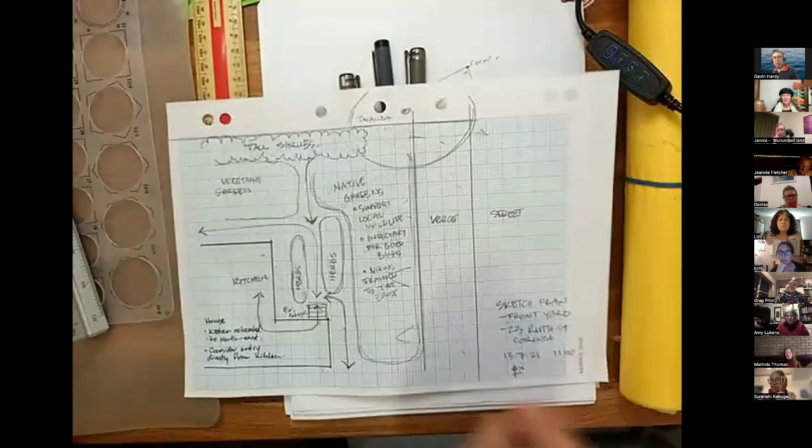And I put on my second camera. Okay, so, you know, I might go to a client's place, and the only graphic thing that I'll do for them is draw up a little mud map.

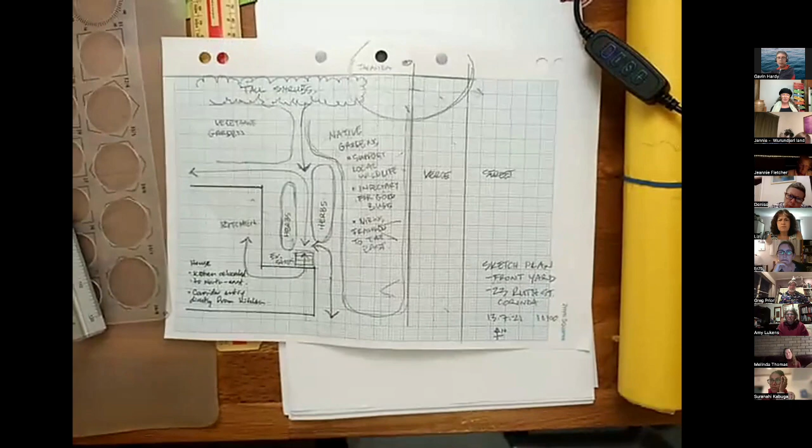Can you guys see that? It seems a little bit blurred in my view, but is that coming out okay, Morag? It does look a bit blurred. Can you focus? Yeah, not sure if I can. I'm using a smartphone as my overhead camera, so it should, but I think you can get the gist there.

Like, you can just see they're basic bubble diagrams. It's a very simple sort of thing. It's got a little title in the corner there with a funny little north point in there. And I've actually drawn it up to a little bit of scale, but a mud map doesn't necessarily need to be to scale. We've drawn this up over the kitchen table at the client's place.

Okay, it's a very simple graphic. This is the same client, and we're just nominating different spaces for different activities, different uses and functions, and how you might move through the site. So you know those arrows, sort of showing access. And if you've done my previous landscape graphics workshop, we got into the sort of bubble diagrams and using arrows and those sorts of graphics to indicate access.

That might be all that's required just to get the message across to your client, just to help them start to think about how to organise their space.

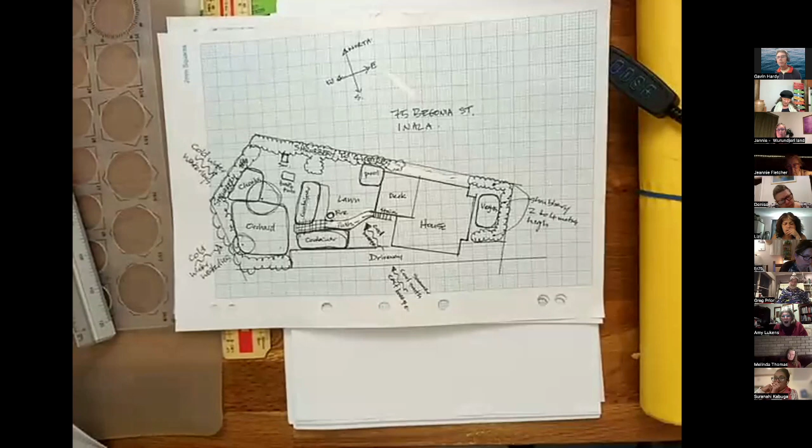What else have we got here? So that's the mud map. The mud map is sort of the first piece of graphic design that you might do, and probably the easiest in terms of drafting something up for a client to use. You take a photograph of it, send it to them, take a scan of it, take the whole thing home with you, then scan it and send it to them. That might be all that's required, and that gives them a start.

That's the mud map. I'm going to talk a little bit about the content of this amazing book. Not sure if there's any landscape architects in the room. Probably not from what you answered in the straw poll, but this is sort of one of the landscape architects' Bibles, this book. First year landscape architects - not sure if they still do it these days, but when I went through landscape architecture 25 years ago, this was the book for learning how to do landscape graphics. And it's still in print. I really recommend, if you're going to get into this stuff, to have a look at Grant Reid's book. So I'm just going to flick through this a little bit.

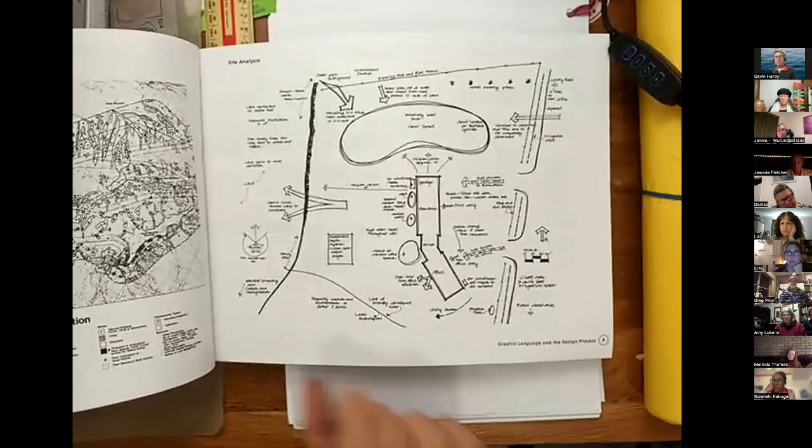Let's talk about the different types of plans drafting that you might get into. Now this is for landscape architects, but it equally applies to permaculturalists who are doing work. So this is a site analysis plan, using the bubble diagram. I'm sorry you can't probably read the text, but again, it's very loose drawing - it's just a site analysis.

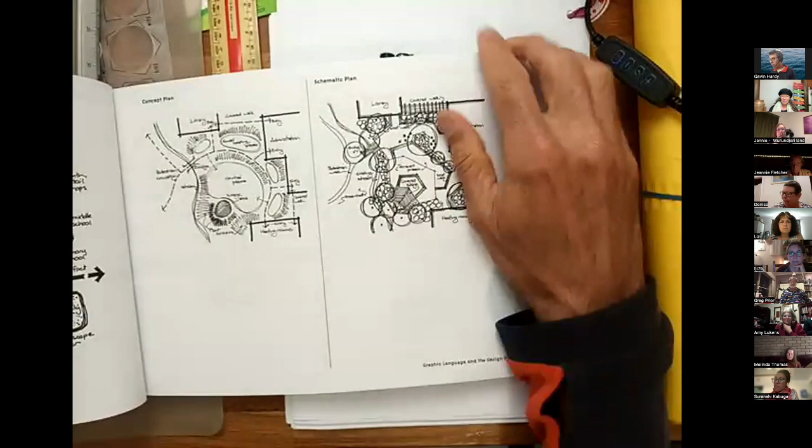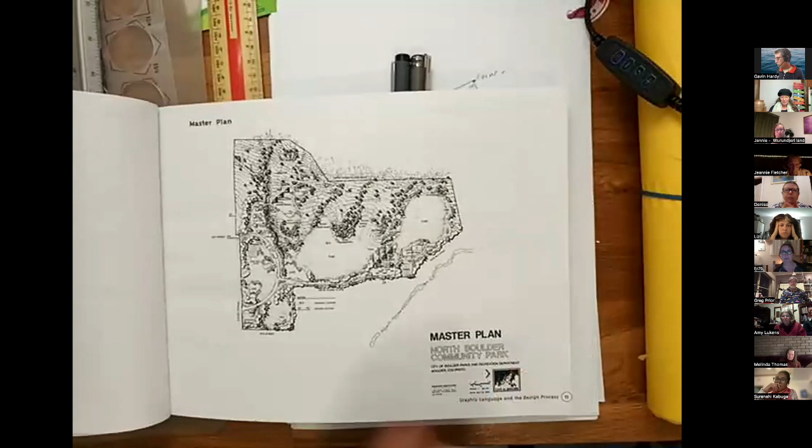So like a master plan, very, very detailed work. You guys probably won't get into master planning so much unless you start working on very big sort of eco village projects and that sort of thing. These days, if you're working at that scale, you'll probably be working with a graphic designer or something like that. You probably won't need to get into that sort of stuff.

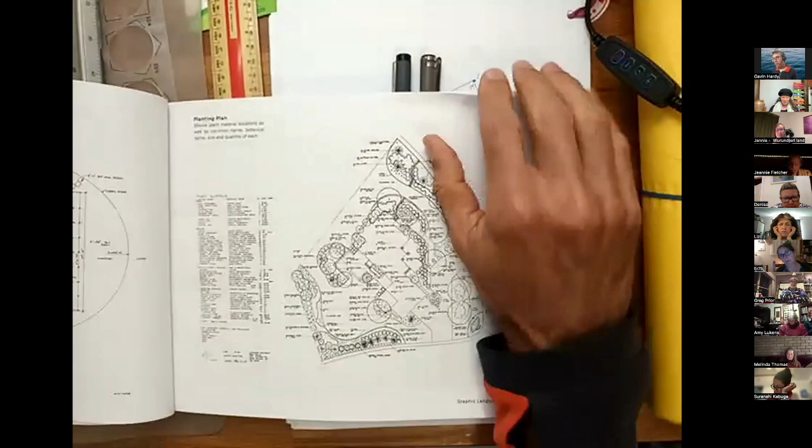Well, you might get into construction plans as well. So these are like grading plans, this one here, or a planting plan. That's the sort of thing you might have to get into. So the different types of graphics, very detailed construction drawings, that sort of thing.

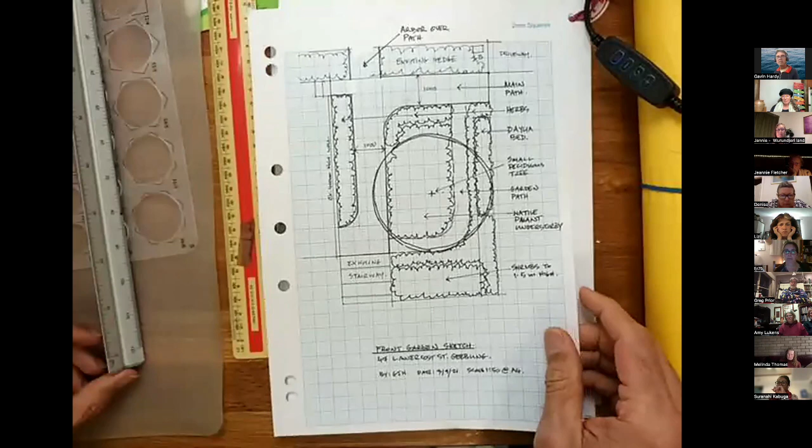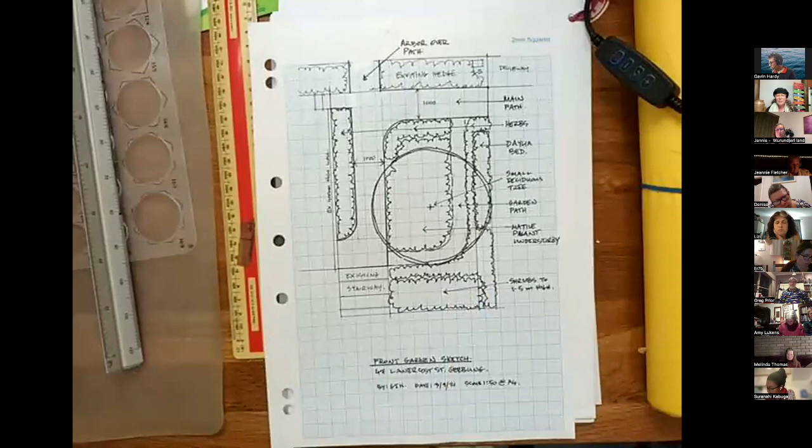Perhaps the next level up from a mud map I was showing before is just a bit more of resolved plans. So again, this is a fairly quick little plan I've done for a client, but it's not as loose. I've used a ruler in this example here to draw up paths and that sort of thing, and it's drawn to scale - the scale is 1:50 in this case. And I've used annotations, these arrows to indicate, and with text to indicate different functions and different things going on in that little garden in there. So that's sort of next level of drafting.

If I share my screen - yes, thank you. See some thumbs up there. So this is sort of perhaps the next level of drafting.

So don't get too - it looks okay, but it wouldn't be accepted in a professional sort of office, architects, big consultancies, that sort of stuff. But for the work we do, if we're just trying to convey an idea, and your client might want to take that information and share it amongst their group and share it around, that style of graphic is probably okay, and it's cost effective too. I mean, you're not going to muck around for too long putting that together.

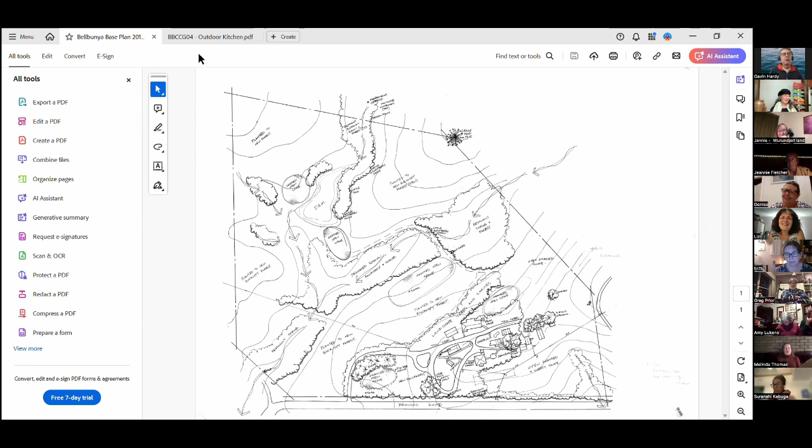So that's actually - I think I can move that image. Maybe it's locked. Yeah, so I've scanned an image, I've inserted it into Microsoft Word, going up into insert pictures, brought it into Microsoft Word. I've set up my page as an A3 size page.

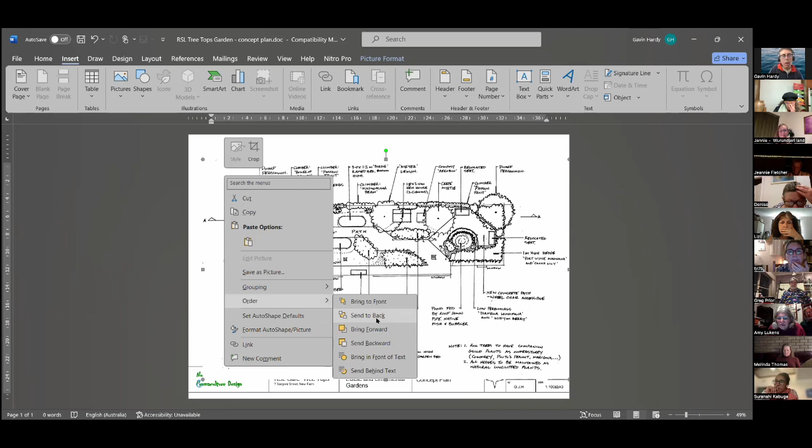And I've got - look at that, it's actually masking over the top of the title block. So I just need to set that back if I can. Oh, and now I've lost it all. So there you go, it's playing around with me a little bit there.

Yeah, but then the title block itself is just created through Microsoft Word, so very easy, I can actually edit all that. They're in text boxes and that sort of thing. So if you can learn that sort of stuff with Word, then you can actually create a drawing quite simply.

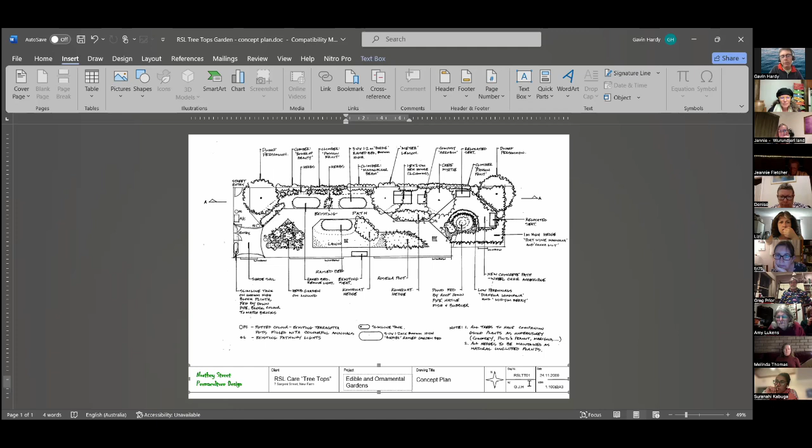Okay, so is there any questions so far around what I've just been showing you? Do you reckon you could pull something off like that? Tracing paper, create a little title block in Microsoft Word, pretty easy, that sort of thing. Later tonight we'll get into creating a title block, all right?

So there's a question there, Gav, around - so Lavina and Chloe asked earlier too about, do we get faster with practice? It takes us ages to draw by hand, was their first question way up. And just then they were saying, what about editing drawings if you want to edit your hand drawings?

Yeah, I just do iterations. I just go over it again with another piece of tracing paper and keep the bits that I want and change the bits that I don't. It all depends on whether you're getting so fancy and colourful with them or not. So Lavina and Chloe and everyone else, you do get faster, but you've got to keep on with it. And you know, I really encourage people just to keep a journal and do some drawings and doodling and that sort of stuff, and just get really confident with using pens and pencils and paper and all that sort of thing.

And then, editing - so the drawings I showed you were the final thing for the client, okay. I'm going to show you just how you work up a design using simple butter paper, okay, so just keep on playing with designs and that sort of thing. One of the drawbacks of hand drawings, and even the final design, is the client might come back and want to make a whole lot of changes. So what do you do? I've only got this hand drawn thing, what am I going to do about it? So you have a master copy basically that you can continue to change.

Yes, there's a whole lot of scales and scale bars in here. Very rarely will you be drawing anything at 1:25, like an architect drawing a room. But you might get to 1:50, like a small garden - that's probably the smallest scale you'll draw. Typically you'll be drawing an A3 plan for a backyard at 1:100, or if it's a big backyard, 1:200. If you're on a rural property, you start getting into 1:500, 1:1,000, maybe even a really big property at 1:2,000.

Do people need a bit of an explanation about what scale is? Is that something people get? I think a lot of people get stuck on that. There's also a question in the chat saying, I've got a scale rule, but notice there's more than one to choose from - do I need all versions? That's different sorts of rulers, but also just scale 101. Maybe just put your hand up - oh hang on, we can't see everyone, drop in the chat if that's a yes, if you just need a bit of scale 101. Yes, yes, yes, yes please. Okay, let's do that.

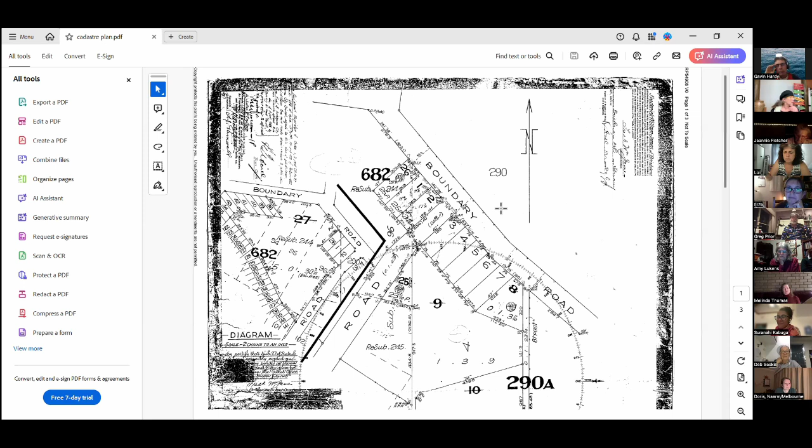So here's an example here, guys, of a cadastre plan. This is a really old plan for a property that I worked on. Let's see if I can pull that across. I can't. If I try and zoom in.

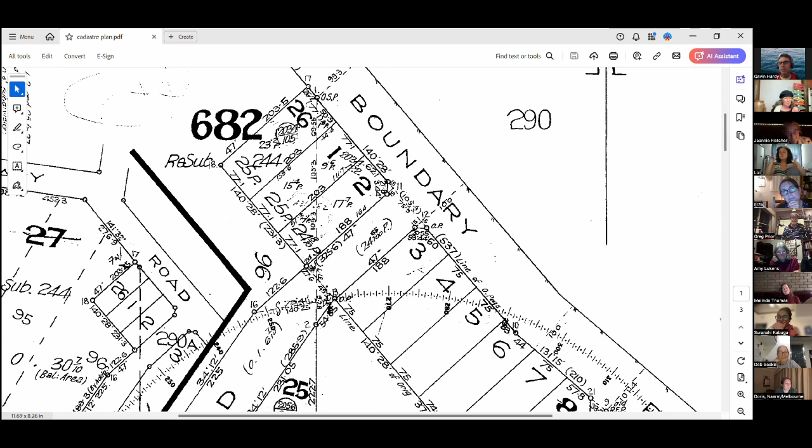So these are different properties on a certain street, Boundary Street, as you can see, and all of the dimensions here are in feet. If you're an American, you'll be familiar with this. If you live in the archaic world of the United States and you haven't got up to speed with metric yet, you'll be familiar with this. Bit of a joke there.

But you'll see there's some dimensions. For example, there's 75 at the bottom of the screen, 75 feet. You'll see 188 feet, that's the size of that property. Back in the 1880s when this part of Brisbane was developed, the surveyors created cadastre plans, or property boundary plans, so that people actually knew exactly what they owned.

And so we can use that information to form the basis of our base plan. You need to make the conversion, converting feet to meters, if you live in the metric world. You can also see some other numbers here, there's 47, that number keeps repeating through there. That's the angle, the bearing of that line, that property line through there. It's an angle of 47 degrees.

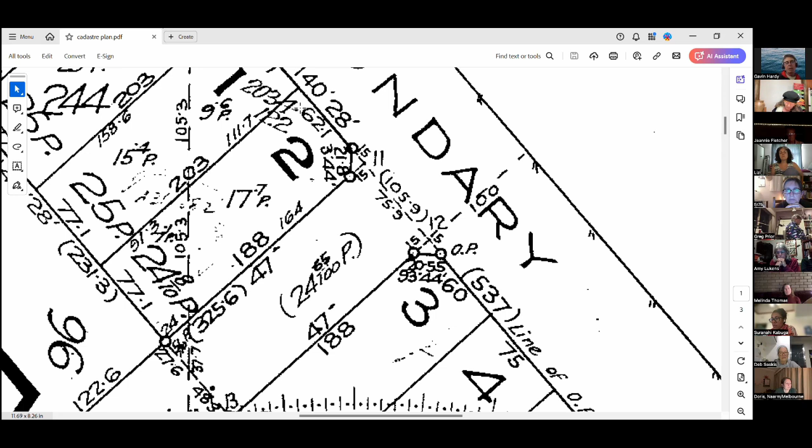You'll see up the top of the screen here, 140 degrees and 28 minutes. It's another bearing of that line running through there. So you can actually use this information to start plotting it on your plan. It's really, really important information to get.

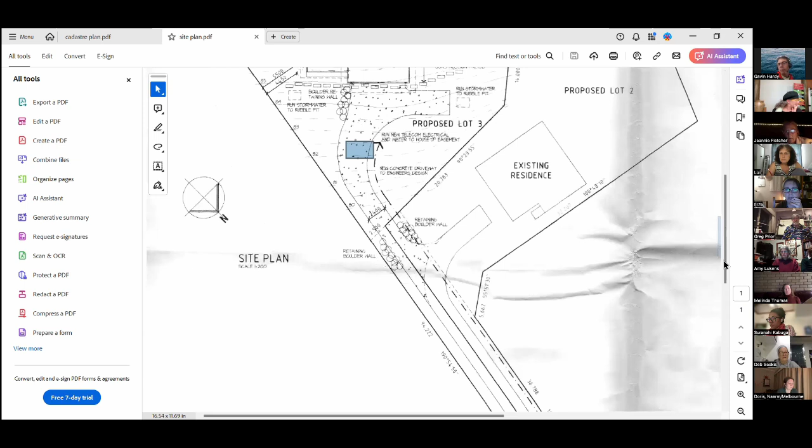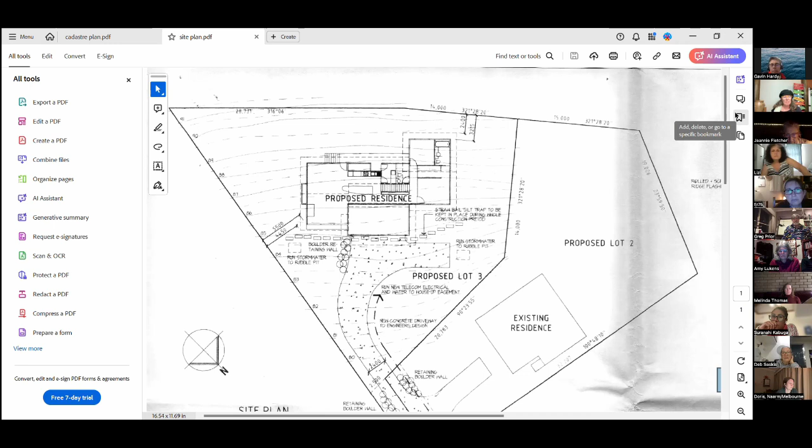Here's a plan that a client actually gave me of their residence. That sort of property information is really handy. It means I don't have to go and measure up the whole site, including the whole property and where it is in relation to the boundary. You can actually use that as your base plan, all you need to do is trace it. If you can get that sort of information, it'll save you a lot of work.

I'll keep going in that direction. You'll see there's the architect who drew it up back in the day, and the drawing has a scale, at the bottom of the screen there, in the title block. So if you can get the original drawing, then you're home and hosed. You've got a scale you can work with, and you can start transferring that information onto your plan.

Any questions as we're going through here? Just looking at the chat now. Yeah, okay, great.

So next thing is how you actually measure up your site. I'm going to share my camera again.

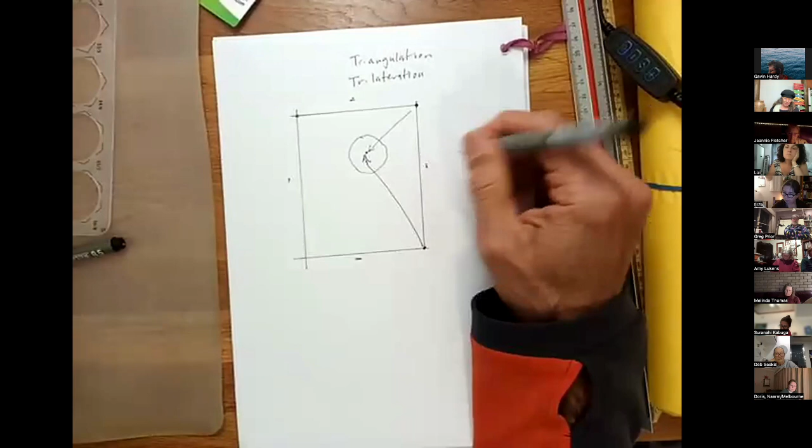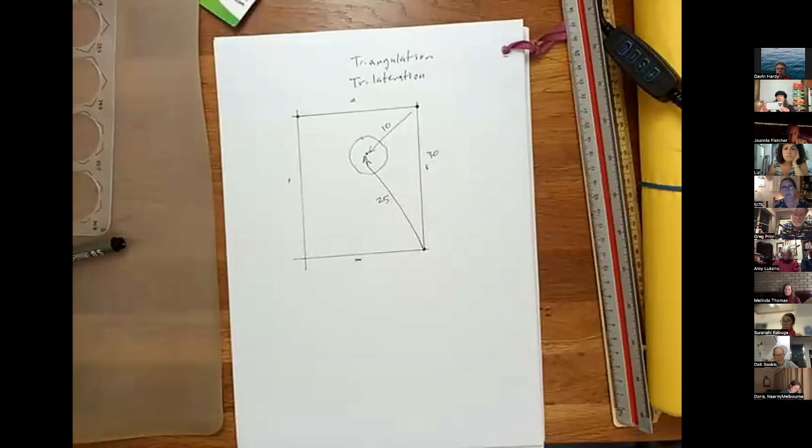Well, if these are known points, and if these are known lengths, then we can use a method called trilateration. You might have heard of a technique called triangulation, where you use angles to work out where things are. But this technique is called trilateration, and it's a far easier technique for most people to use. If you get a tape measure out on site and measure from that known point, the corner of the property, to the tree trunk, and from the other known point at that corner of the property to the tree trunk, then we have 3 known lengths: the length of the property boundary, and two others. Not going to get into algebra, I'll give it some real numbers. Say that's 30 meters, and then we might have this length here, say that's 10 meters, and that's 25 meters. We can take that information and plot it on a plan. That's a very simple example, and we can do that for all the trees and all the features all over our property if we need to. We can trilaterate every feature on our property.

Surveyors will use triangulation if they've got an instrument that will help them do it. The way GPS works, fun fact, is through trilateration - the global positioning system. When you're driving your car, where are you in the world? The satellites are up there trilaterating where you are. Does that make sense to people?

Let me just stop sharing. Yeah, that's right, triangulation is using angles. That's right, Morag. You can set up 2 datums as well, yeah, that's not a bad way to do it either, but the way I teach it is just trilateration.

That's sort of the technique. So have a go at that at home.

Very soon, just something that you know, either the property boundary or your corner of your house or something like that to a tree. Just measure it up and see if you can plot it on a plan. That's trilateration.

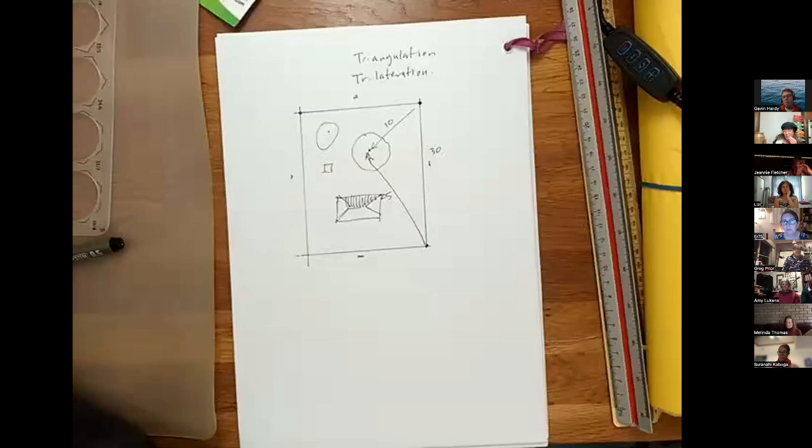All right, so we understood we've got known lines. They're called property boundaries. There they are there. And I've got features within my site that I want to measure, and I want to know fairly accurately where they're located. And I've got known points on the property boundaries.

So from those known points, I can take measurements. That's really what we're doing here, from known points to unknown points. Okay, so that's my property boundary. And that's my property boundary.

Okay, and I just get my tape measure out. Really helps if you've got 2 people to do this. It's very hard to do this by yourself. I'm just taking a measurement from there to there, and for argument's sake, it's 10 meters.

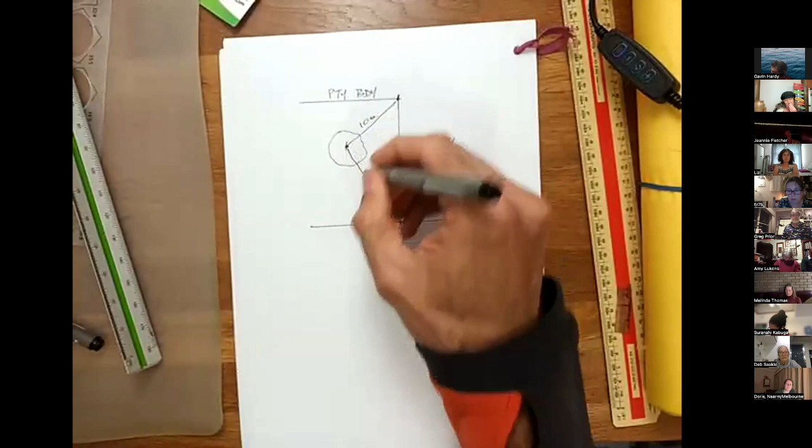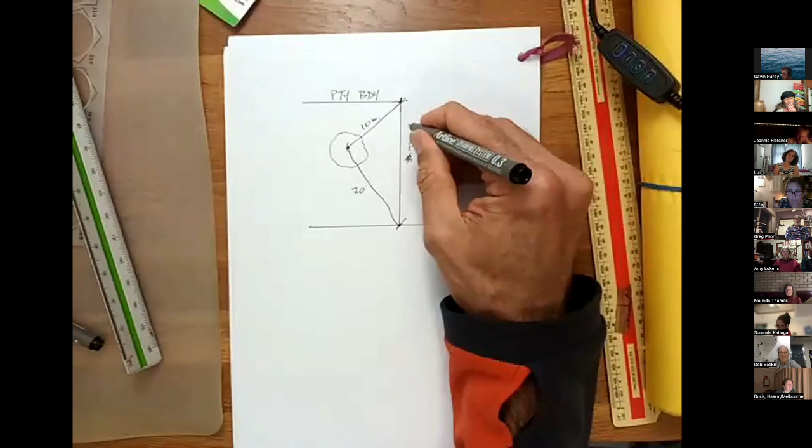And then I'm taking another measurement from there to there, and for argument's sake, that's 20 meters. And if I already know what that measurement is, because it's a known line, it's property boundary, I might have got it from a cadastre plan, might have even measured up along a fence line. Fence lines don't always correspond exactly with property boundaries, but they're a fairly good indication, say that was 30 meters. So I could take that information and then plot that on a plan. And I'll show you how to plot that on a plan to scale in a minute.

Okay, thanks Gav. Does that make sense for folks? Yep, and I think the plotting on the plan is the next important part of the puzzle, isn't it - understanding how that gets from your notebook onto your plan. Yes, exactly. All right, so let's go into a little bit of that.

Okay, I'll come back to aerial plans in a bit. I think you're probably champing at the bit to understand how the heck do I draw things to scale, so I'm just going to get into that work now.

All right, here we go. Bit of an exercise I'm going to get you to do, but first of all, okay, have a read of this. Okay, so working out the appropriate scale.

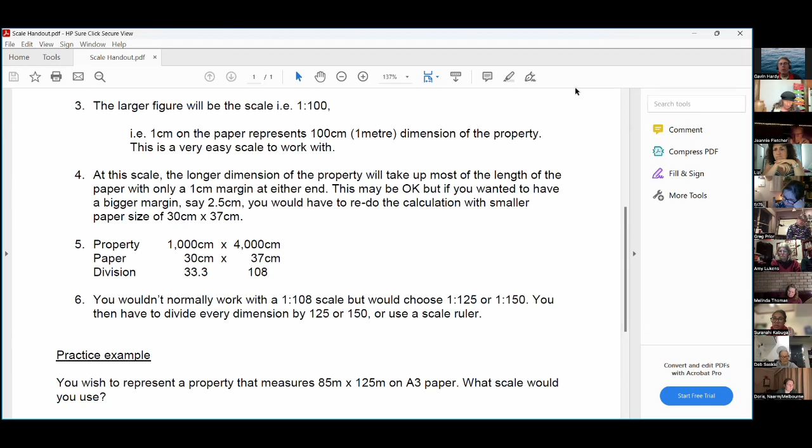Did we all have a bit of a go at that, or were you totally confused? Let me know, either in the chat or just shout it out. What answers did you get? Confused, confused. All right, we might go back through this again then.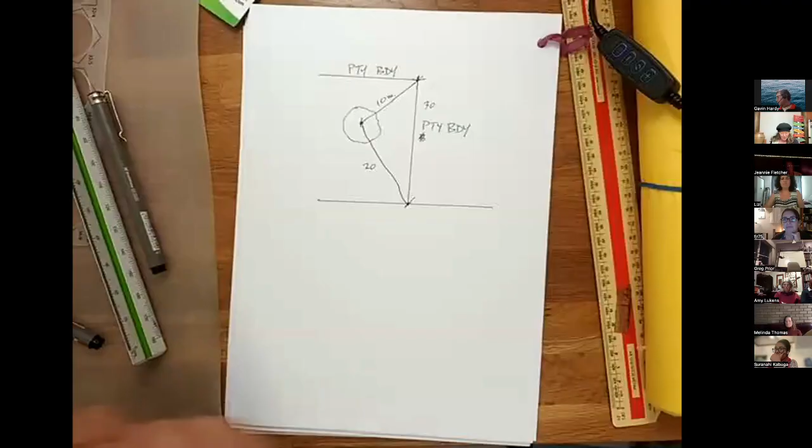Okay, so the question was... actually, what was the question? I can't see it anymore, but I think the property was 85 by 25 metres. That's the size of our property. And my A3 sheet is, for argument's sake, rounding to the nearest 10, 30 by 40 centimetres. So what I'm going to do first is convert metres to centimetres.

I've got 85 metres by 25 metres, which becomes 8,500 centimetres by 2,500 centimetres. And I'm simply dividing the larger number into the larger number. So 8,500 divided by 40. Anyone got a calculator on them right now? They can work that out for me, that'd be great. And 2,500 divided by 30.

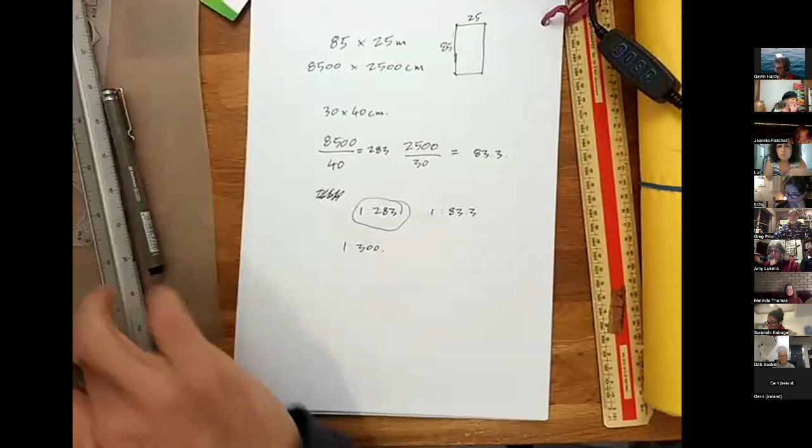Yeah, 1 is to 300. I was saying to Daff that it's an awkward scale, I don't really like it. Sometimes you do see it on a scale ruler, like on this scale ruler there is a 1 is to 300 line along there, and we could certainly use that. I think it's a bit clunky myself. I would possibly go as to 1 is to 500.

So a few people are saying in the chat 1 to 250. Why wouldn't you do the 1 to 250? Why are you going the other way? Explaining: yes, if we go to 1 is to 250, you get a bigger drawing, don't you? If you think about it, you're heading towards 1 is to 1.

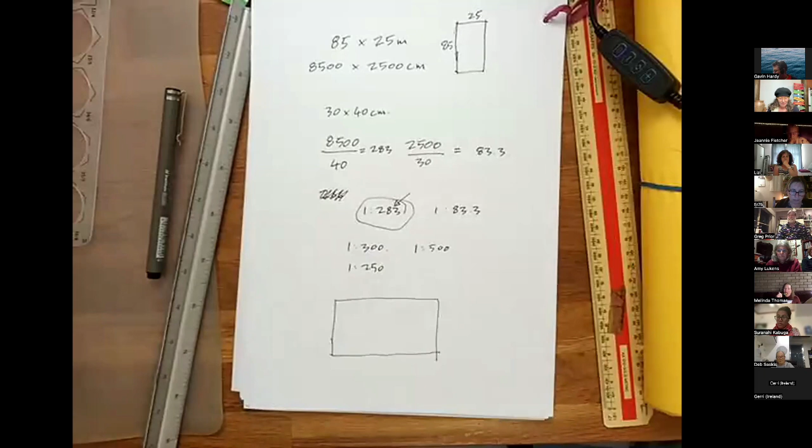You're getting smaller with that number, but it's a bigger drawing, and it simply won't fit on the page. Okay, there's a bit of a paradox. So the larger that number, the smaller the drawing becomes, you know. So yeah, if you did it 1 is to 250, say you did it 1 is to 250, and this is your page, this is your A3 page that I'm representing here, you might find that your site, you can't fit your site on there.

So, you know, your site property might actually go like that. You can't actually fit it on there at 1 is to 250, but at 1 is to 300, you know, it'll fit on your page. At 1 is to 300, and at 1 is to 500, it'll certainly fit on your page.

Yeah, scale can be quite a confusing thing, and it's important to get your head around what scale is. All right, does that provide people with a bit more clarity?

You reckon it's what? It's 212, Greg, not 283. All right, there you go. Thanks, guys. So it should be 1 is to 212. Sorry, don't listen to that, that's all me. All right, 212.5. Okay, 212.5, 200 or 212.

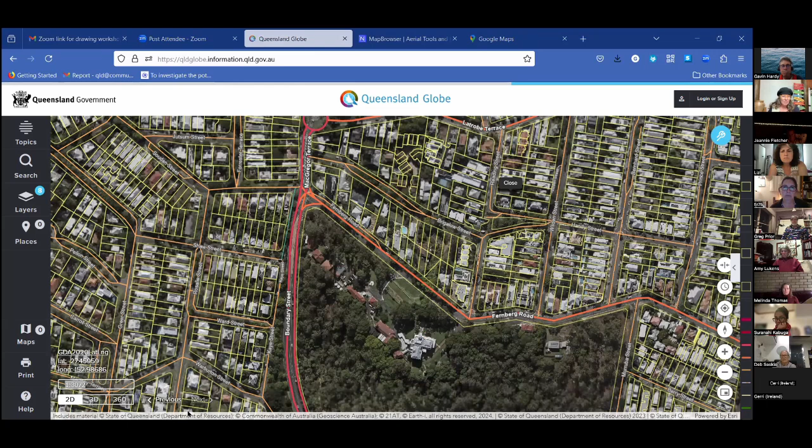Hope this is all making sense to you. What else are we going to have a look at? Oh yeah, Google Earth Pro, let's have a look at that. Is anyone using Google Earth Pro? No, all right, so has anyone used Google Earth before? Yeah, you've all used Google Earth. We'll have a sort of pro version of it.

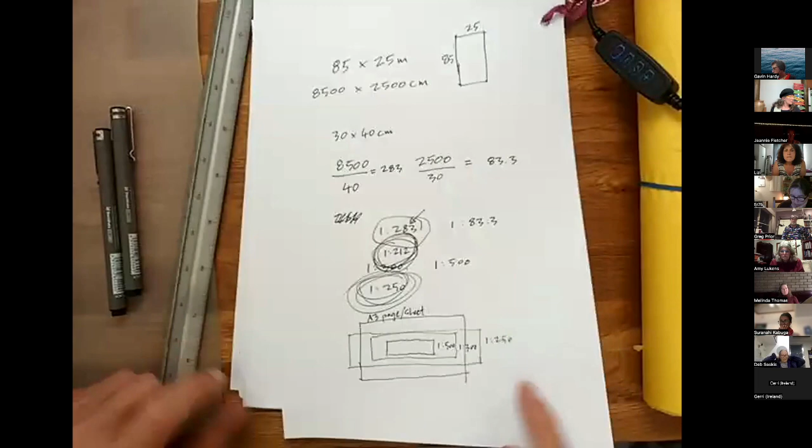So we've been talking a lot about scale rulers, haven't we? Make sure you get hold of a scale ruler - can either be one of these nice metal triangular ones, or the flat type one. In terms of pens, I typically use an Artline drawing pen, a felt tip, 0.3 millimeter point tip - that's one of the pens I'll use. I'll also use a 0.5 Artline drawing pen, felt tip. You can go to an art supply shop or order this stuff online.

A felt tip pen is nice to use - different line weights with different pens, 0.5, 0.3, sometimes even a 0.2. Those were Artline pens. This is a Staedtler pen, a nice light 0.2. So you can pick up those pretty readily.

Pencils. I will also use a pencil. Sometimes I used to use a clutch pencil, but these days I just use a pretty basic drawing pencil with a sharpener. That can be quite good just to rough out your ideas. The pencil's quite nice to use, it's quite forgiving. It's not an accurate thing, but yeah, I use a pencil for my final drawings too.

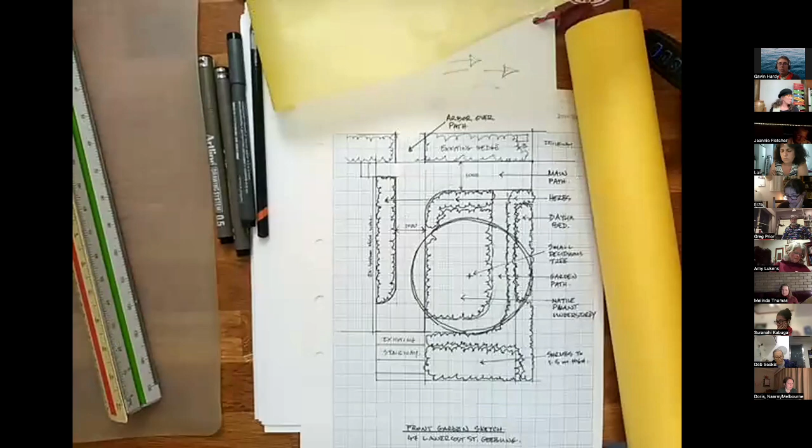Then there's graph paper as well. It's quite handy to do things very quickly with a client on the kitchen table at their place. The grid lines are quite handy because they give you a bit of a guide for your drawing work.

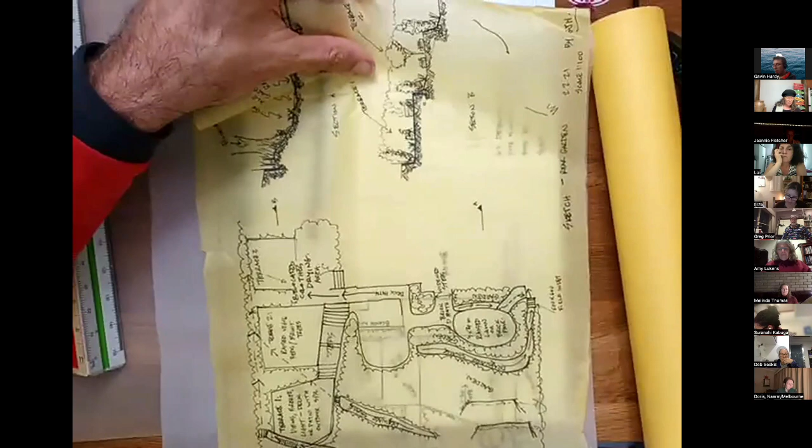There was a question about design - what graph paper size do you use? I just use A4. But what about the grid - do you use millimeters or the 5mm grid size? Yeah, this is the millimeter grid that I use, but try out different ones, give it a go.

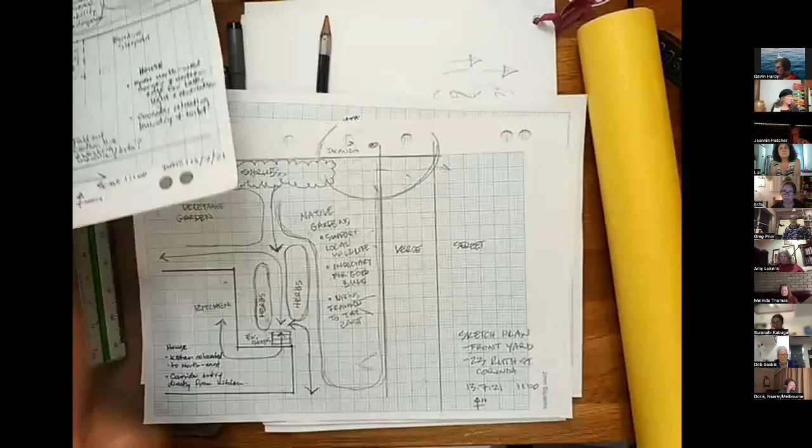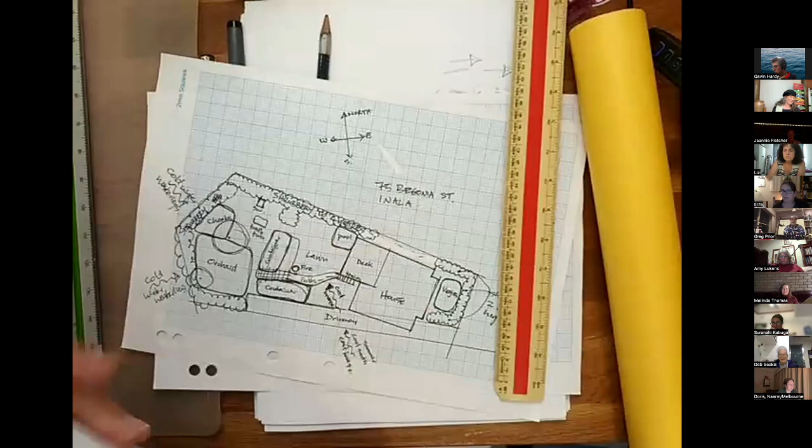So the bigger squares are 1 centimeter. Actually, the smaller squares are - gee, that's interesting, I thought they were millimeter, but I think they're 2 mils. Yeah, they're 2 millimeter grid. There you go, it says at the top of the sheet - 2 millimeter squares, I never knew, I just use the stuff. I've used 5 millimeter square stuff in the past, but I tend to use that scale, it seems to work quite nicely for me.

I haven't got any here to show you, but there's also just cartridge paper, A3 cartridge paper, that you can use to draw up your plans with as well. Let me show you some more examples.

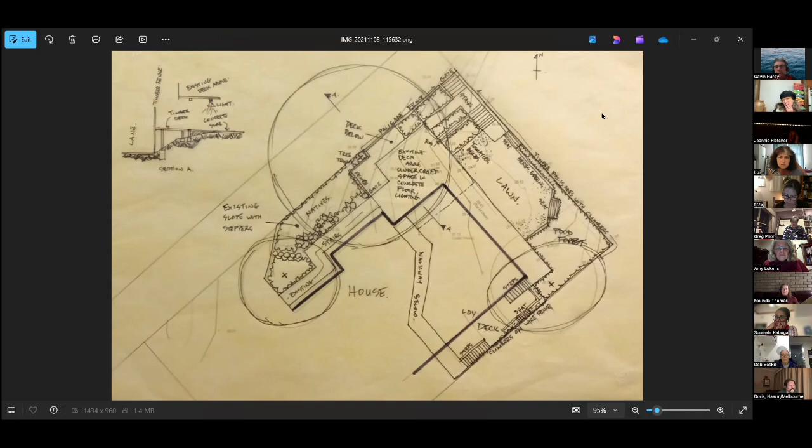There's an example of using yellow trace, or you guys can use butter paper, just to draw up some ideas. You might use this to work up a design before you actually produce the final design. I don't know if you can see it, but that yellow trace, you can actually see it on the screen here. Underneath the yellow trace, there's a survey plan below that, which has been produced by a professional surveyor.

There's some cross sections that I've used using the butter paper, and there's another iteration of the same site, just using the yellow trace, just to try and give me some ideas what I'm going to do on this site. So that's the yellow butter paper, that's how you can sort of use it to start playing around with different designs. You can just keep laying on more butter paper, playing around, taking that sheet off and putting another sheet back on, working up a different design again over the top of that.

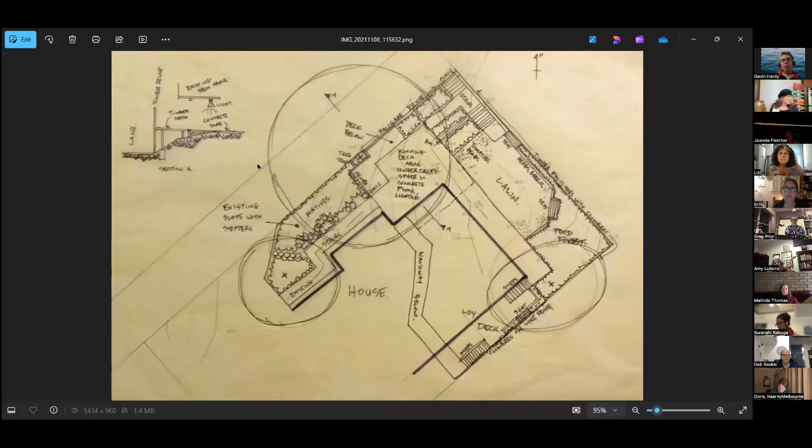So does that help people think about how you progress to getting a design together? Just using lots of butter paper, working up a design by laying it over the top of your base plan, that sort of thing.

Dee's asking, do you keep copies, records, archives, or do you sort of build it up? It's a good question - funny, today I was actually going through a lot of my stuff to show you guys, and gee, I didn't really keep a lot of my old butter paper plans. I don't have a great record of them.

I think it's because you just work up so many sheets over time, doing lots of different projects. So I've only really kept a few, maybe some towards the end, or some that I want to show a client before I get to the final plan. I might show the client my butter paper sketches, so we're not too locked in yet. Presenting a final concept to a client can feel like the whole thing's locked in, and we don't really want to do that until we're really certain. Even with concept plans, concepts are just the beginning - the design is actually not the end mission, guys.

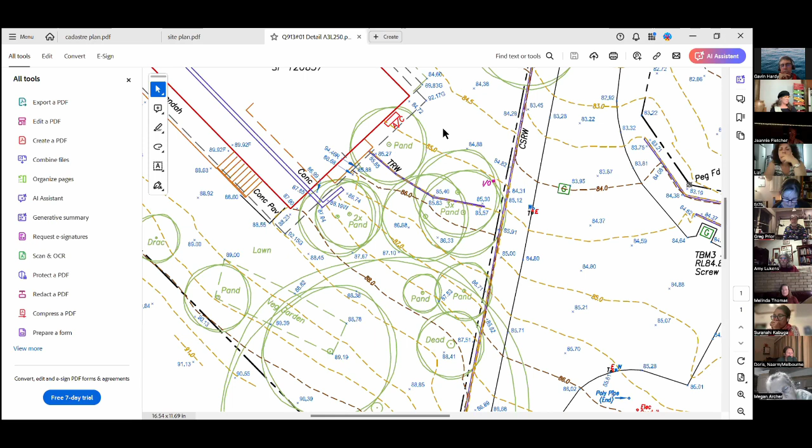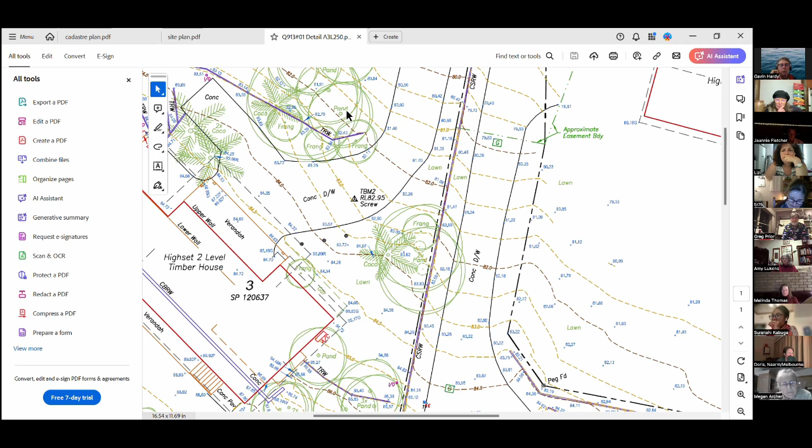Hopefully he's also picked up some of the underground services - I'm not sure if he has on this plan, coming into the property. Not showing it on that plan, but that's something you can ask a surveyor to include when they're giving you a terrain and features plan.

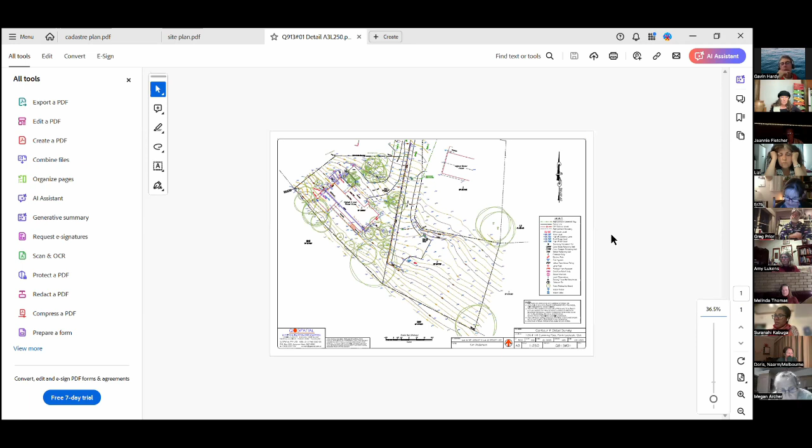Yeah, a contour and detail survey. Really handy information if you've got a client with a budget and you really think you need to get a plan. So this is a very steep site. If you have a look at the contours there, that indicates it's quite steep - about a 1 in 3 grade running through that property. So a lot of terracing involved for the design of that property. That's why we got a surveyor involved with that one.

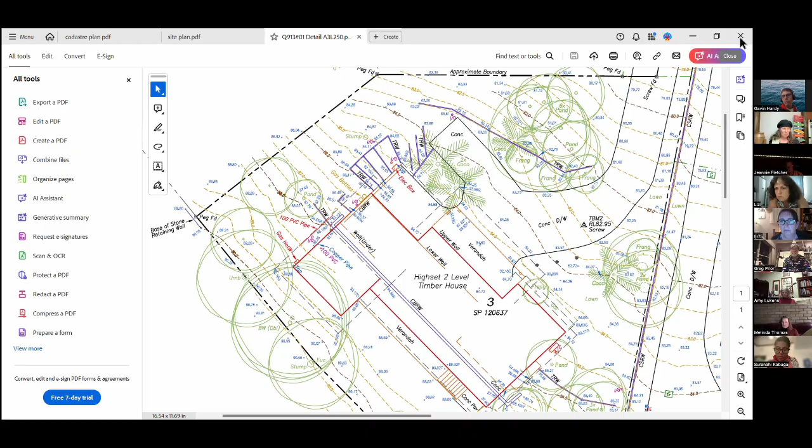Okie doke. How are we going? Is this going well for you, or are you even more confused? There's a couple of little questions, one from Lavina and Chloe again - how long would most clients expect to take to get their final drawing? As a client, or as a design consultant, how long do you normally take to deliver?

It depends on the complexity of the project. There's an old adage in business: under promise and over deliver. So you might think it's going to take you 2 weeks to do - always double it, so it's going to take a month. Probably going to take 6 weeks actually, because other things will come along. So it's very hard to estimate those timeframes, but it does depend on the complexity of the project, and a lot of working with clients is just managing their expectations. It also depends on how much time you've got - if you've got multiple projects on, other things going on in your life. One of the things in professional practice is just to be able to sit down and work out how long it's going to take you to do a design. And when you're starting out, it's going to take you a lot longer than an experienced designer like myself. That's why I keep coming back to this notion of trying to work out what graphic products you want to offer your client, because you can actually spend a lot of your client's money doing a whole lot of documentation work and time, and maybe you don't need to.